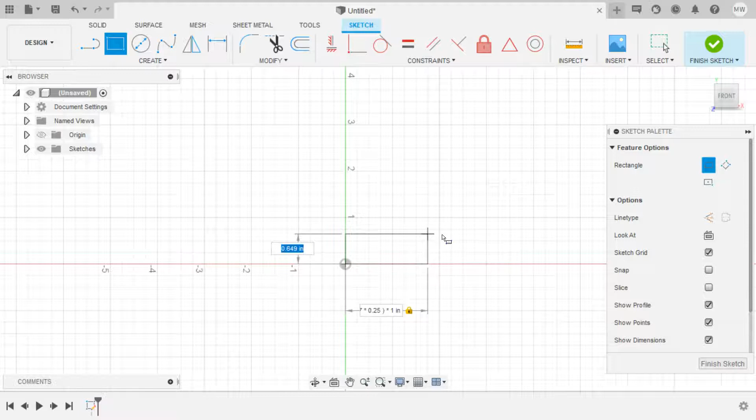I'm going to create a sketch, XY plane, draw a rectangle, and the width is going to be 7 star 0.25. Hit tab, and the height is going to be 2 star 0.25, and then you can hit enter. Then I'm going to finish the sketch and extrude, dude.

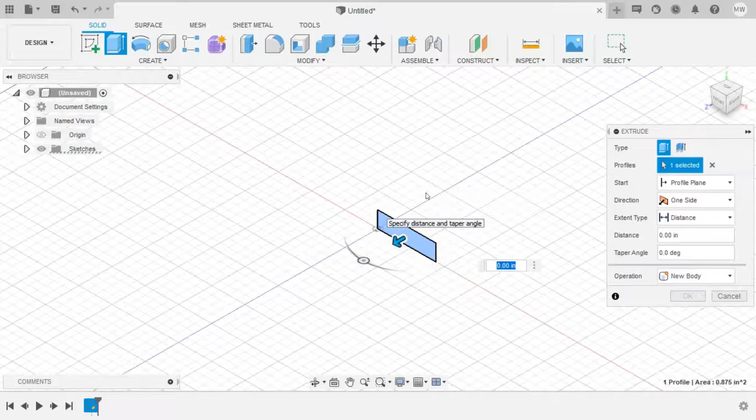The extrude, I believe, was 6. Getting some lag here when I come back. That's a little weird. 6 star 0.25. So there's the base block. And then all we got to do is extrude out of that the two smaller rectangles.

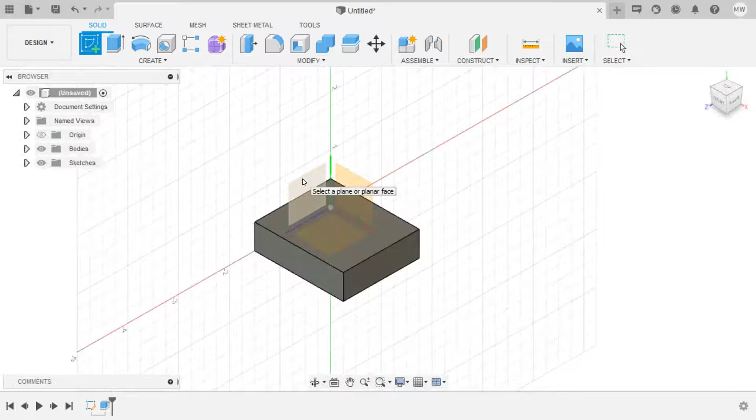So I'm going to click create sketch. I'm going to click on top of this. Now make sure you don't accidentally get your XZ or YZ, one of those planes. You want the top of the box that you made. So I'm going to click right here. There it is. And these two boxes are going to be in the corners of this, and they're 2 units wide and 3 units tall.

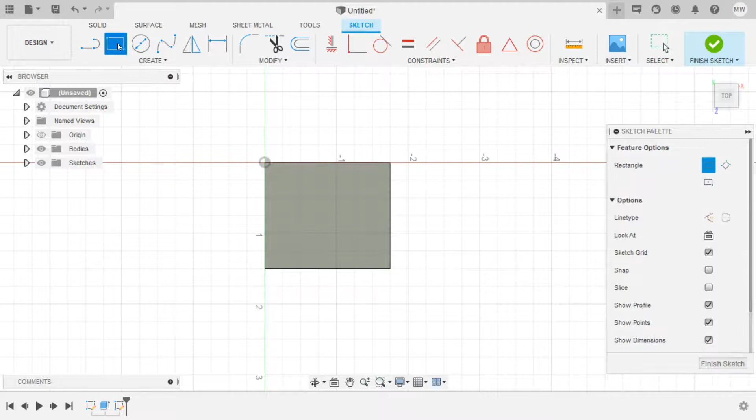So I'm just going to do 2-point rectangle, start on the corner here and click, and the width is 2 star 0.25. Hit tab, 3 star 0.25 there. And then on the other side, it's the same exact thing. 2-point rectangle, click, you see it'll snap to the corner. 2 star 0.25. Hit tab, 3 star 0.25. Hit enter.

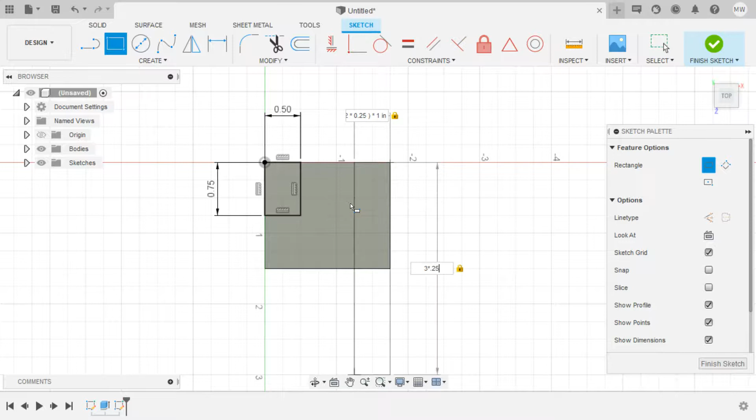Finish the sketch. And then we're just going to extrude. Click the extrude button. Select both of these rectangles that you drew. And then the height is just 2 squares, which is 2 star 0.25. And I'm doing the star thing just to help you in case you don't know the numbers. But if you could do the math in your head, that's fine. If you know two times 0.25 is 0.5, then by all means just type 0.5.

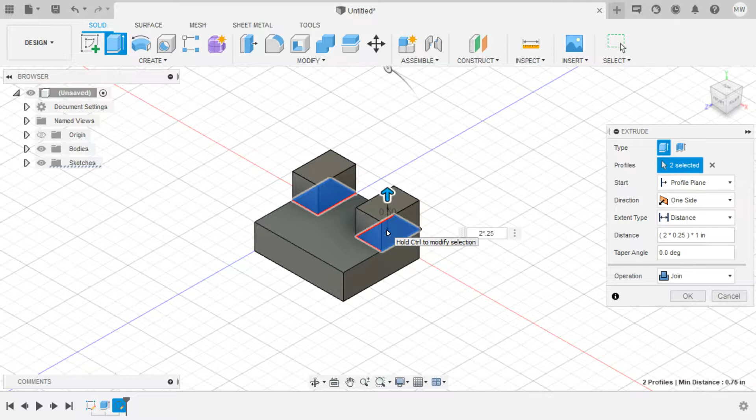I'm going to hit enter. There it is. Compare it. Just make sure. I always go look at the original picture and make sure that I did it right. It's easy to goof these up.

So go back here, and I'm just going to save it. Hit the save button. This is going to be number 4. You could say figure 4 or whatever. Make sure you have the right project. You could see I didn't select the right project here before I started. So I'm going to use the drop down and find my Fusion Model Creation 2 project. Then you can close the drop down. Make sure it's got the right location, and then hit save.

And then, as usual, go and get your shareable link, and then copy that and add it to Google Classroom, and you're done.